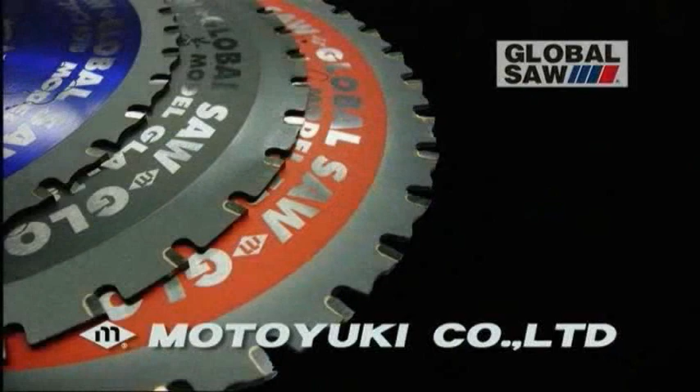MOTOYUKI Company Limited's Global Saw is the top brand of saw blades for steel cutting in Japan. We offer products that please our customers, made using our high technological capabilities.

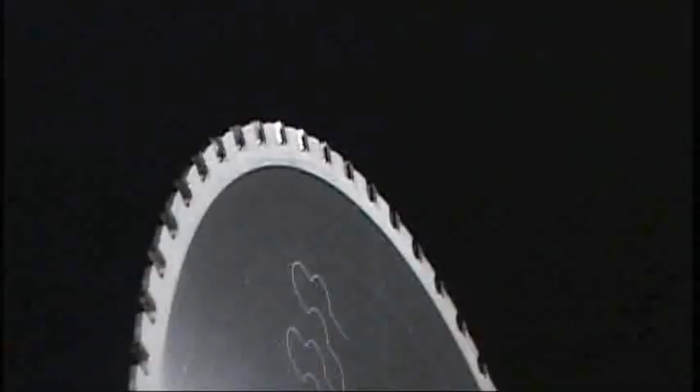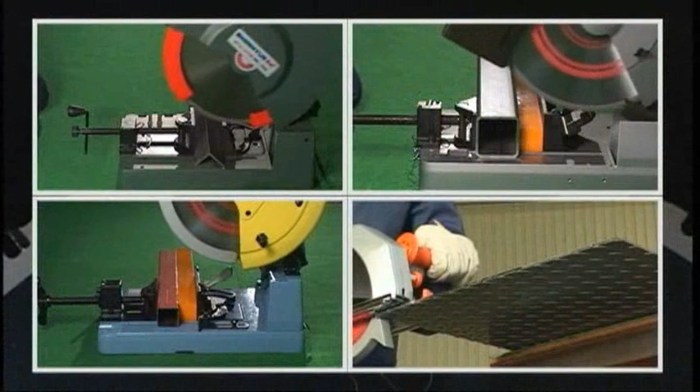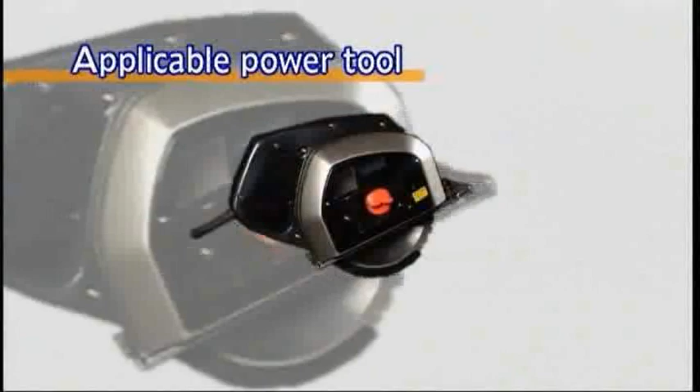In order to use the steel cutting saw blade safely and extend its life, please read the saw blade instruction manual and the power tool instruction manual thoroughly. Use the saw blade with applicable machinery that conforms to the outer diameter of the blade and the rotation speed. Power tools specially created for steel cutting saw blades are already produced by several makers.

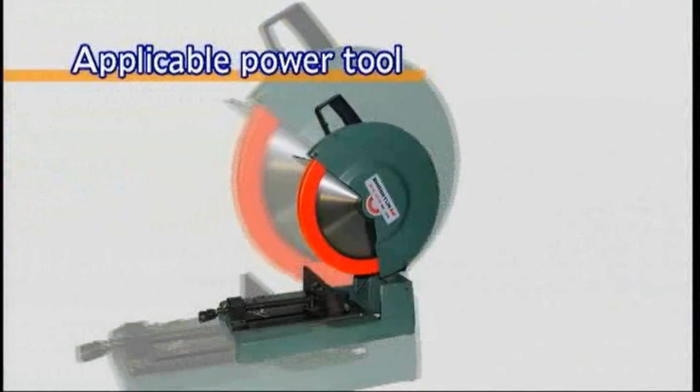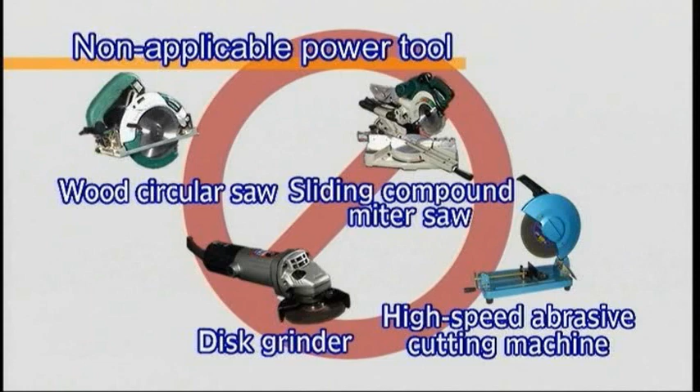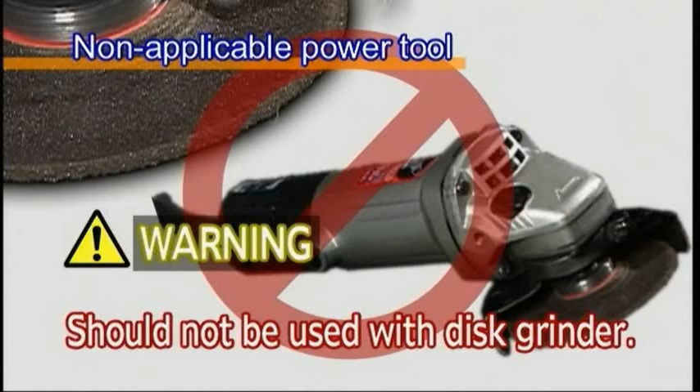The steel cutting saw blade should not be used in disc grinders or high-speed abrasive cutting machines. These machines, in addition to not having adequate rotation speed or output for use with steel cutting saw blades, are not equipped with safety covers or functionalities, and they cannot provide sufficient capabilities. For these reasons, they cannot be used safely.

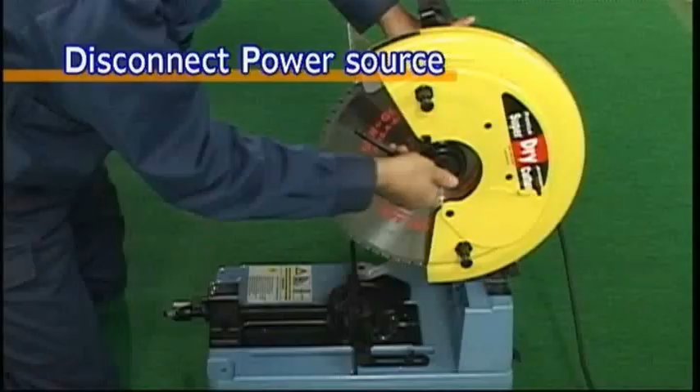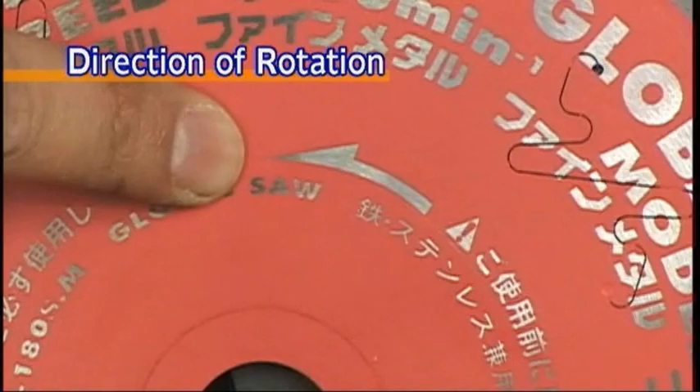When installing or changing a saw blade, always unplug the power tool's power cord from the electrical outlet first. Install the saw blade so that it corresponds to the power tool's direction of rotation, and tighten the flange securely so that it does not come loose.

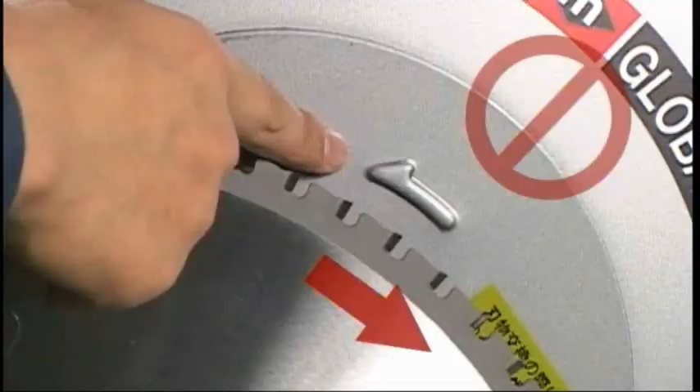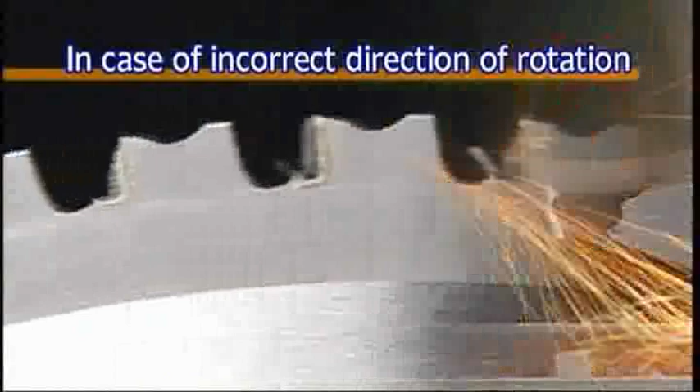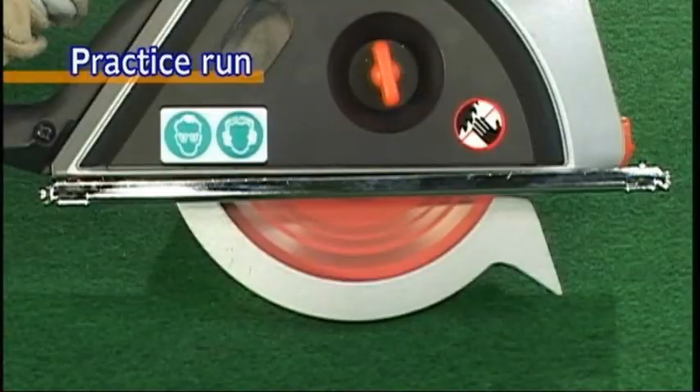When the saw blade has been mistakenly used in the wrong direction of rotation, not only will it fail to cut, but the tips of the blade will all be damaged. Always be sure that the blade is installed in the correct cutting direction. After installing the saw blade, please give it a practice run, making sure that there are no abnormal sounds or unusual vibrations.

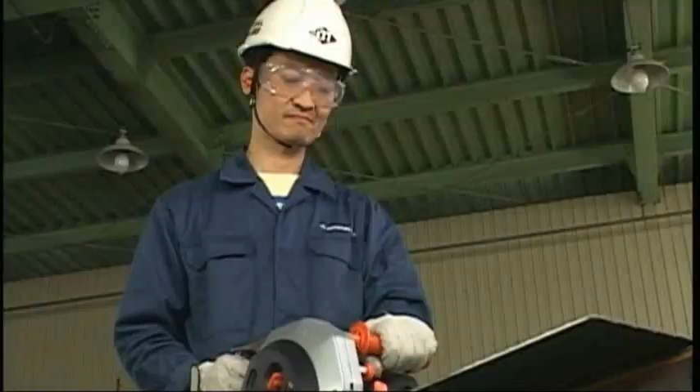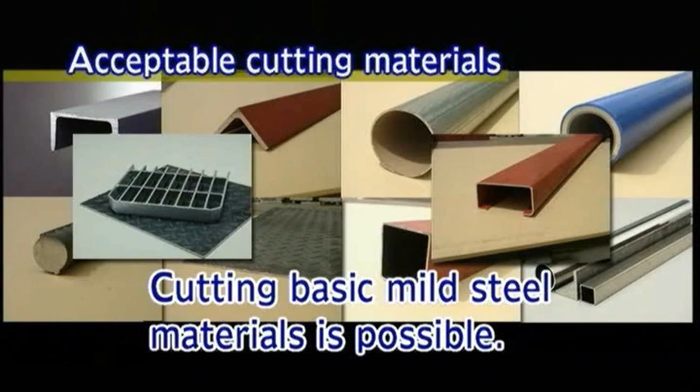For your safety, always wear personal protective equipment. In addition, check your work environment, and do not allow anyone except the operator to approach the equipment while it's in use. The steel cutting saw blade can cut basic mild steel materials. It cannot cut composite materials such as wood, plastics, and non-ferrous materials.

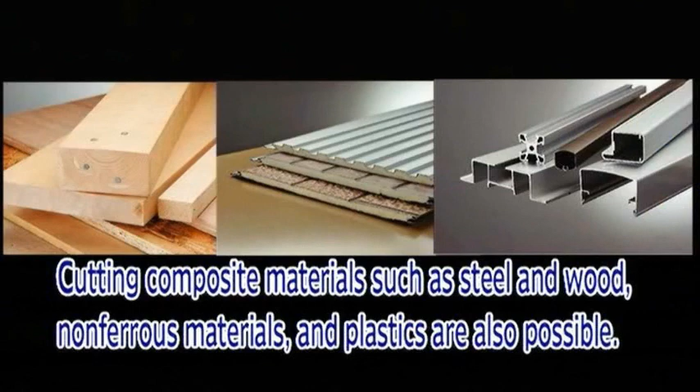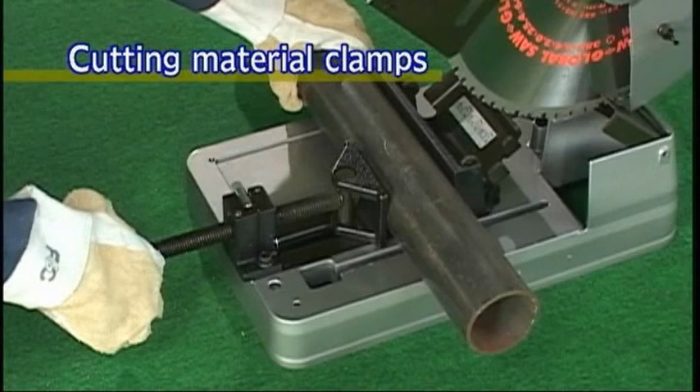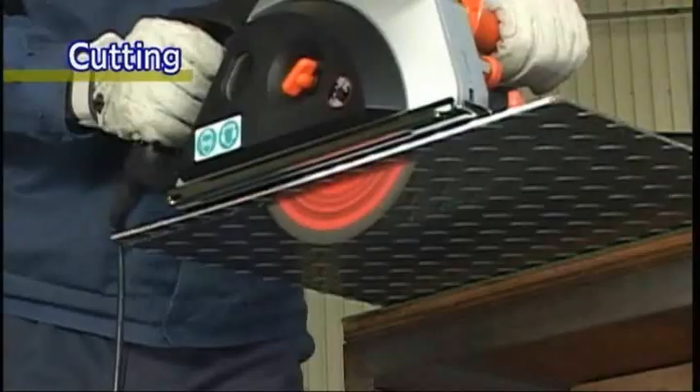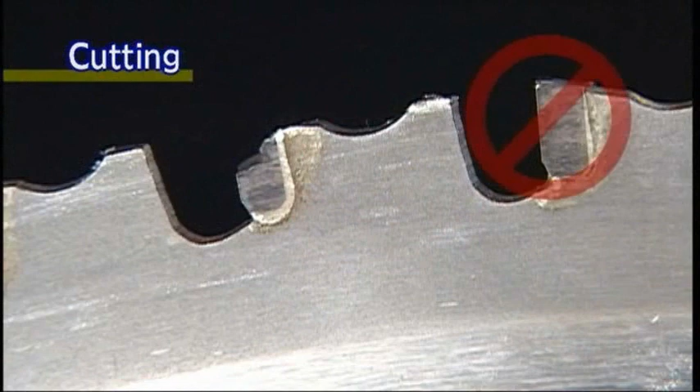Completely secure the cutting material. Please take care while cutting, as the operation of the equipment will become unstable when there is rattling or wobbling, which in turn will damage the tips of the blade and the main body of the saw blade. Begin cutting when the power tool has reached a sufficient rotation speed. There is a high risk of damaging the tips of the blade or the main body when starting the power tool while the saw blade is in contact with the cutting material, or when jarring the cutting feed.

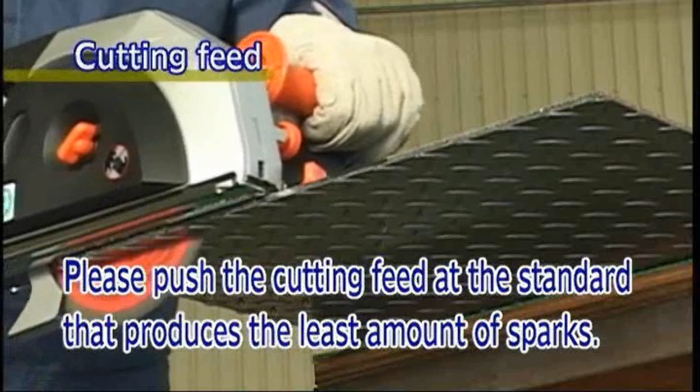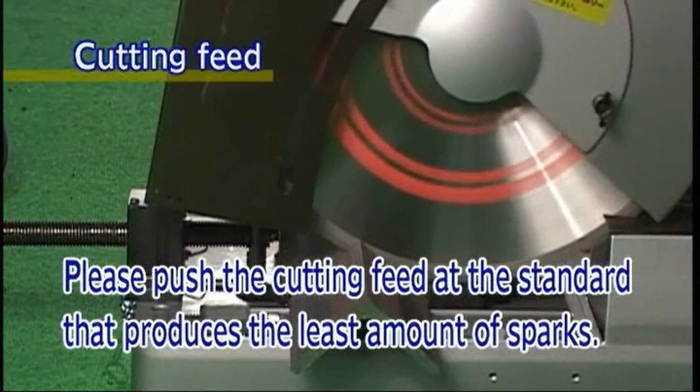Feed slowly until the cutting material begins to cut. Then feed the cutting material at the speed which produces the least amount of sparks. In contrast to a cutoff wheel, there is a minimum of sparks and dust, and the saw blade does not leave burns or burrs on the cutting material. In addition, the external diameter of the saw blade does not grind down, which lengthens operating life and substantially raises operating efficiency.

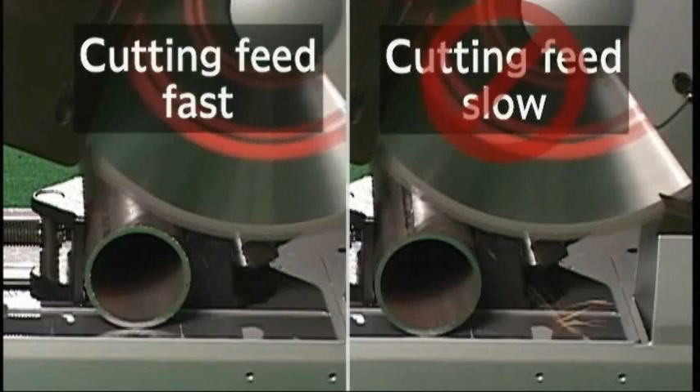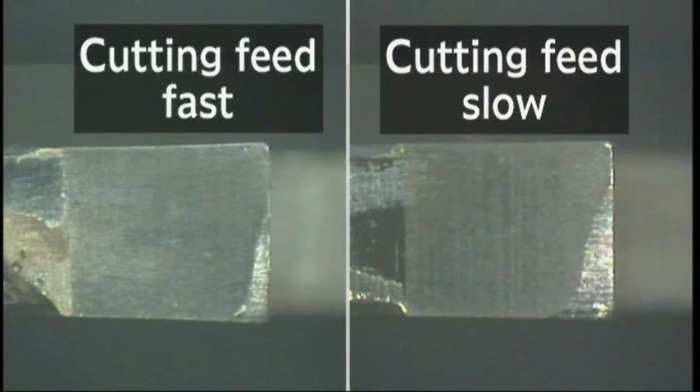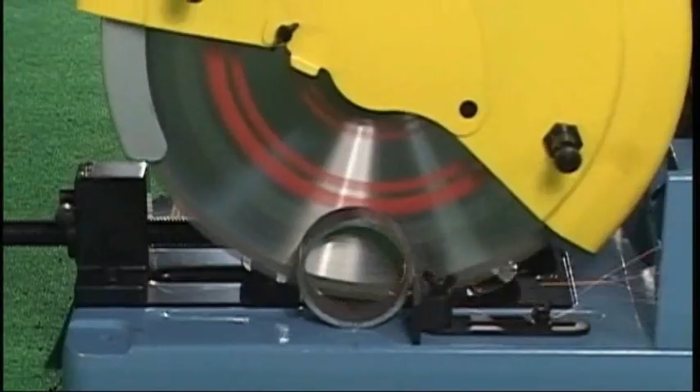As a characteristic feature of the steel cutting saw blade, slowly feeding the cutting material from beginning to end quickens wear to the cutting edge. Feeding the material quickly but forcefully lengthens the life of the blade. Always cut in straight lines. Cutting with a steel cutting saw blade allows high-speed cutting not possible with a cut-off wheel. Cutting nonlinear patterns such as zigzag cutting, rotary shearing, or diagonal cutting are not possible. In addition, when aborting cutting, please disengage the saw blade from the cutting material while it is still spinning.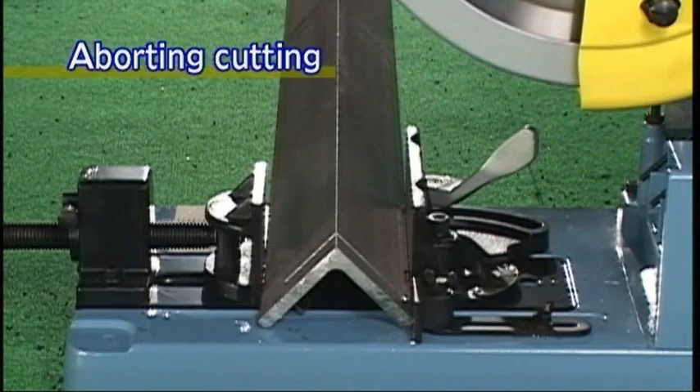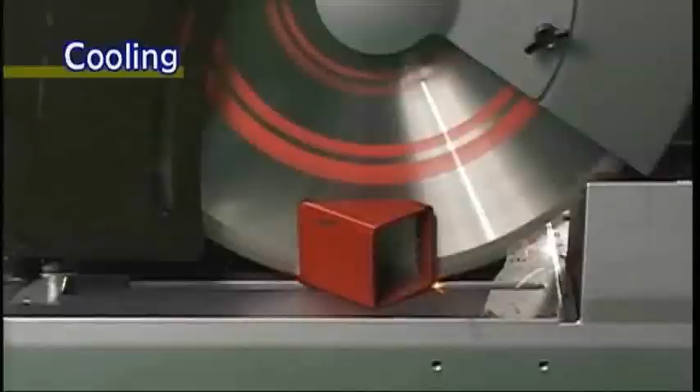A super hard alloy is used on the cutting edge of the steel cutting saw blade. Therefore, chips may occur while in use, but this poses no hindrance to cutting. The occurrence of moderate chipping serves as good self-sharpening action of tip wear and maintains sharp edges. Continuous cutting causes the saw blade to reach high temperatures, quickly dulling the edge. So take frequent breaks to allow heat to dissipate.

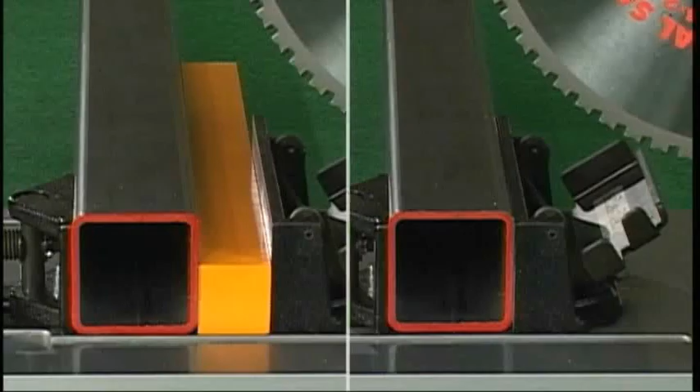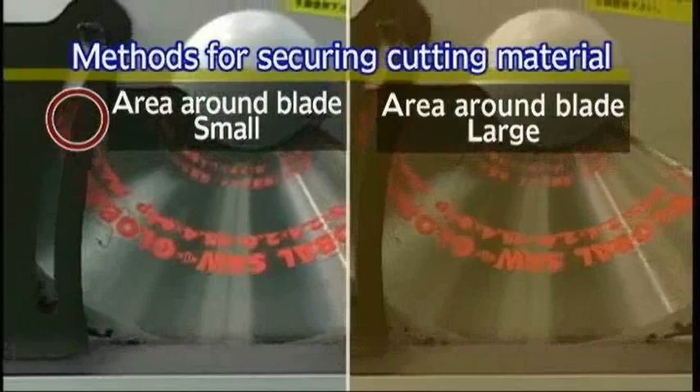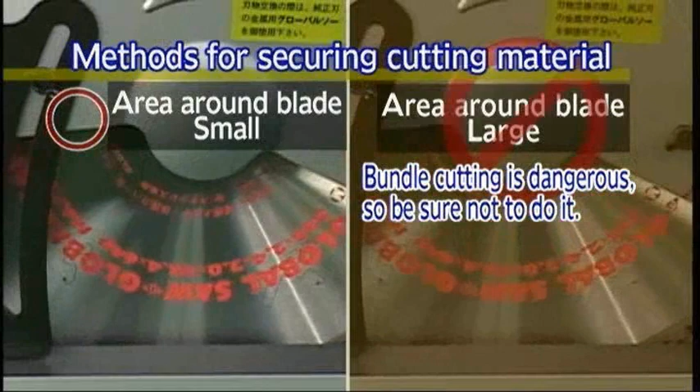Adjust the method of securing the cutting material as appropriate. Minimizing the area of contact between the saw blade and the cutting material raises cutting efficiency, improves sharpness, and extends operating life. Inspect the saw blade prior to each use. Make sure that there is no bending or cracking on the main body of the saw blade, and use your equipment safely.

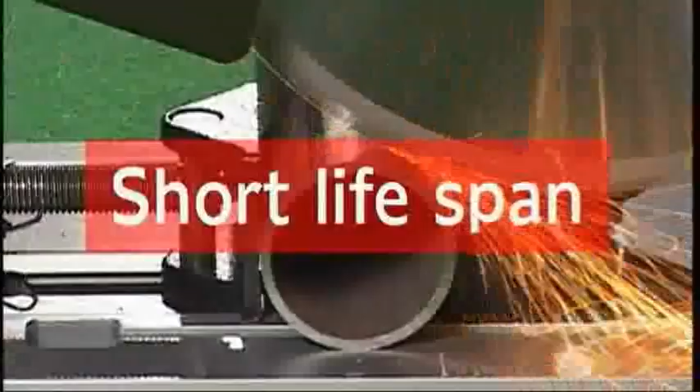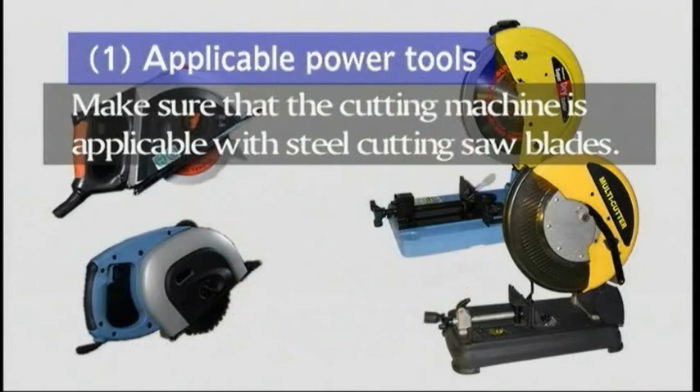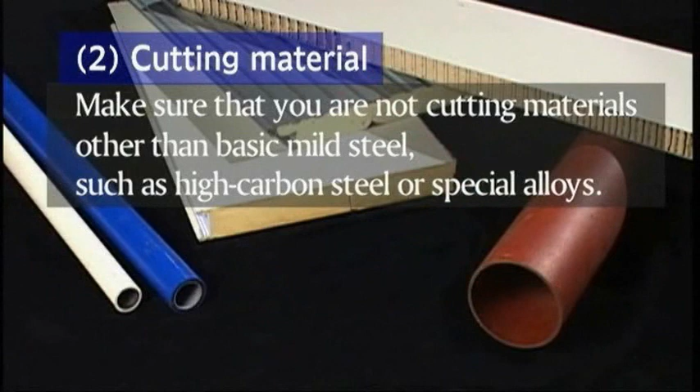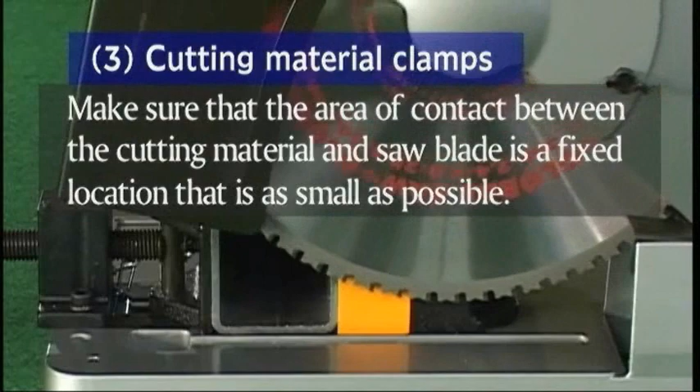Finally, if the following kinds of problems occur when using the steel cutting saw blade, check the respective points. Short operating life. Applicable to the power tool: make sure you are using the steel cutting saw blade with an applicable power tool. Cutting material: make sure that you are not cutting high carbon steel, special alloys, or any material other than basic mild steel. Cutting material clamps: make sure that the area of contact between the cutting material and the saw blade is a fixed location that is as small as possible. Cutting feed: make sure that the cutting is occurring slowly throughout the cutting process.

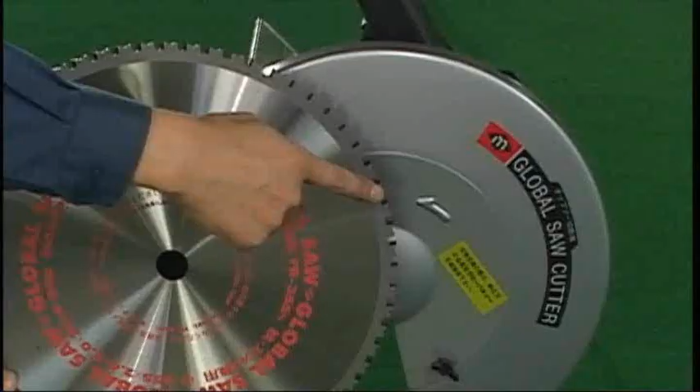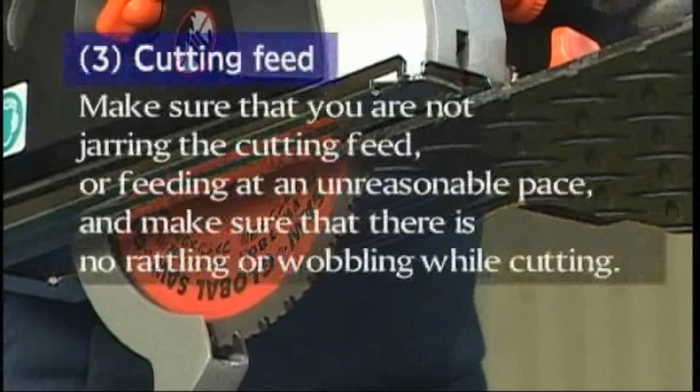The occurrence of chipping. Direction of rotation: make sure that the direction of rotation of the power tool and saw blade coincide with each other. Clamping the cutting material: check whether the cutting material is securely clamped in place. Cutting feed: make sure that you do not jar the cutting feed or feed at an unreasonable pace, and make sure that there is no rattling or wobbling while cutting.

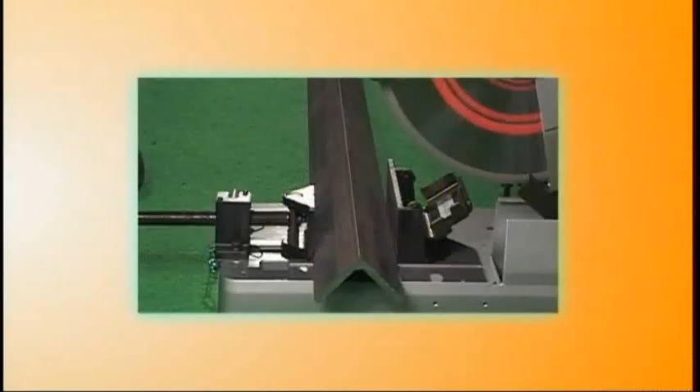To increase the life of the steel cutting saw blade, as well as to use it safely and to raise the efficiency of your cutting work, be sure to fully understand the warnings regarding usage.